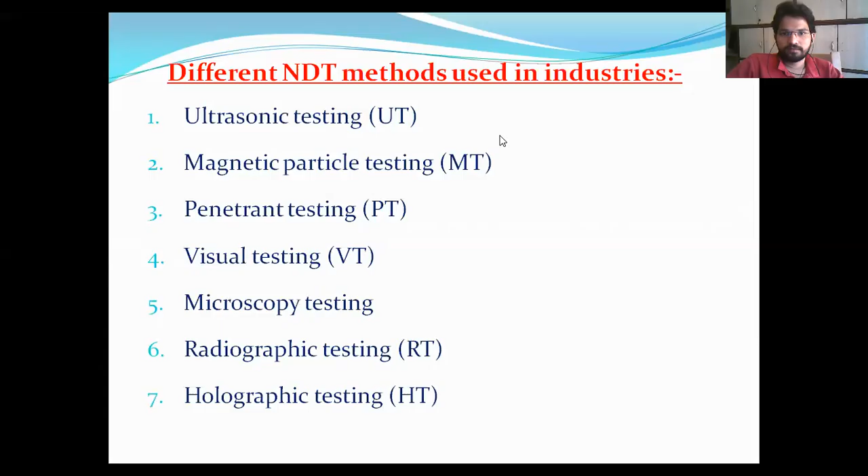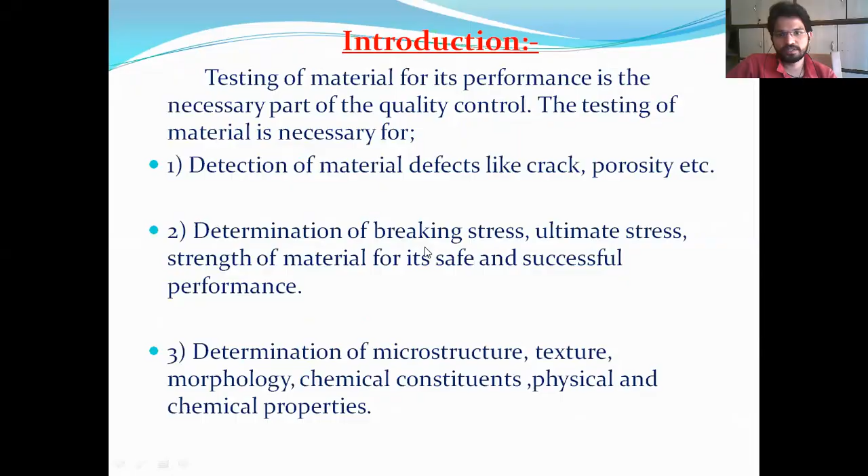Just consider repetition केलं तर again बघा, you consider again your chapter content, your introduction, what are the testing material, why the testing of material is necessary, then its defects, breaking stress किती आहे, microstructure किती आहे, testing च्या दोन मेथड, destructive testing, non destructive testing.

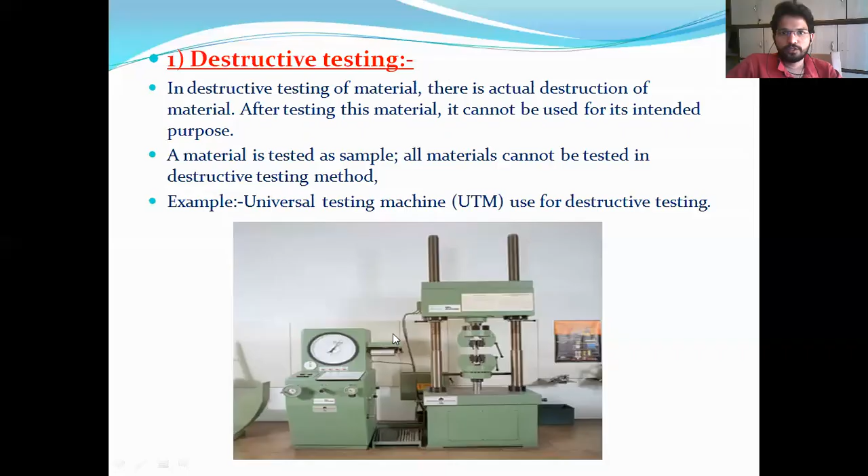Destructive testing means testing with actual breaking of the material. This material can be tested, example दिले UTM machine. Non destructive testing means without destruction of material can be tested.

Its advantages for the NDT methods, limitations of NDT methods, त्याचे disadvantages काय किंवा demerits. Criteria for selection of the NDT methods.

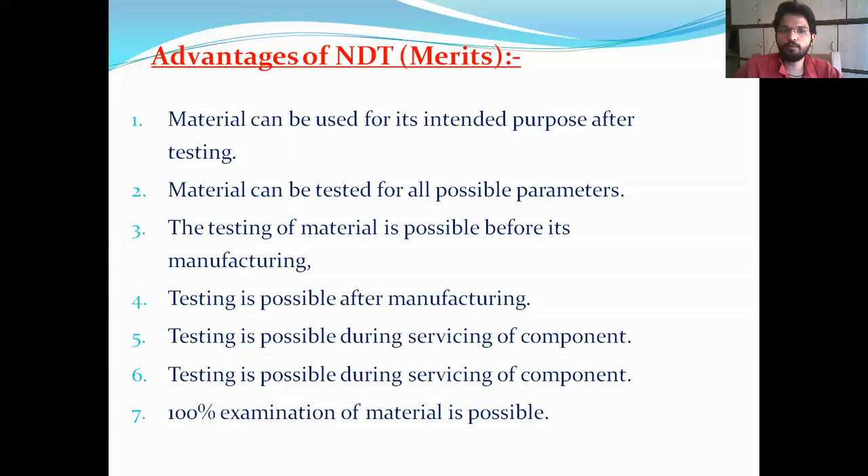Criteria means याच्यावरती MCQs काय विचारतात, MCQ mainly different, which are the following is advantages of NDT methods. Means तीन दिलेले असतात, फोर्थ ऑप्शन असतो ऑल ऑफ दी अबोव, और हे मिक्सअप करतात लिमिटेशन ऑफ एनडीटी मेथड्स किंवा डिसएडव्हांटेजेस आणि ऍडव्हांटेजेस. विच ऑफ द फॉलोइंग इज ऍडव्हांटेजेस और डिसएडव्हांटेजेस, त्यावरती तुम्हाला करेक्ट ऑप्शन चूज करायला लागतं.

And then one more is a different criteria for selection of NDT methods. हे पण MCQ मध्ये विचारतात. Different NDT methods used in industries.

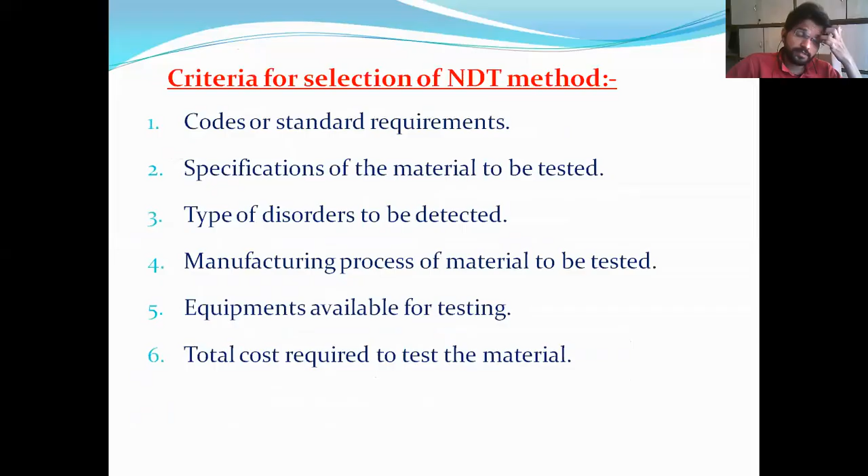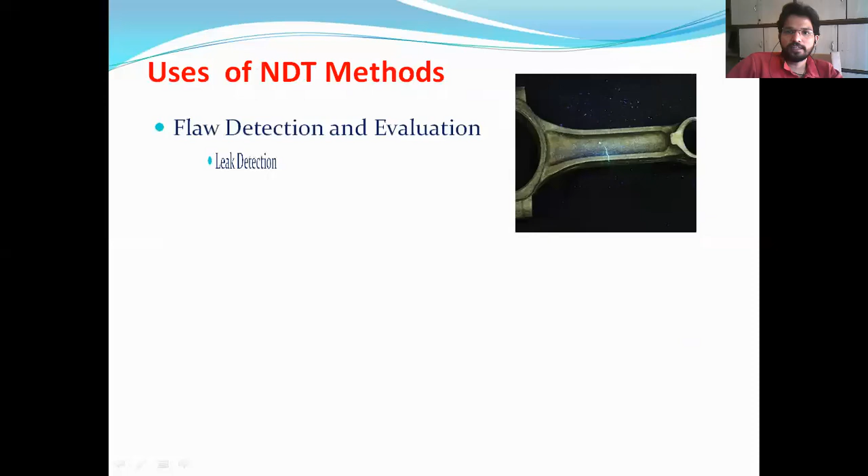Now we are going to, again, the introduction of the non-destructive testing. Some people are for the testing of the material as NDT methods. The uses, the NDT methods uses कोणकोणते?

Flaw detection and evaluation, leak detection, location determination, dimensional measurement, structure and microstructure characterization, estimation of mechanical and physical properties, stress, dynamic response measurement, material sorting, and the chemical composition determination.

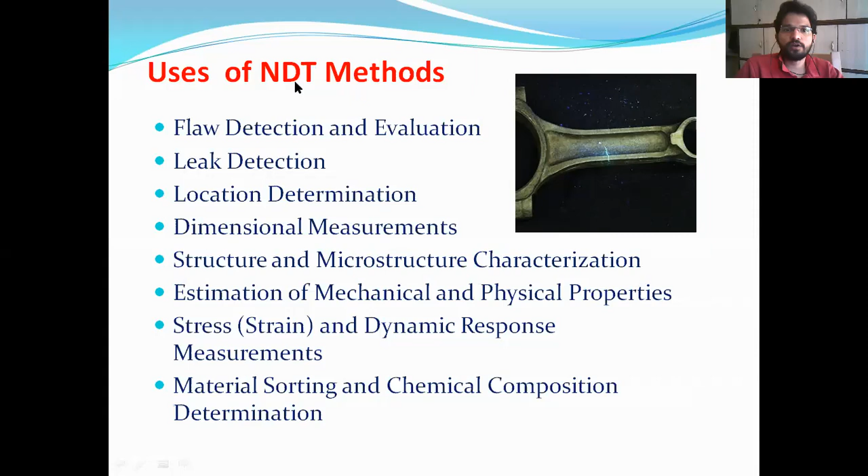These are the use of the NDT methods, or upon using NDT methods कोणकोणते specification किंवा which testing we have to done. Hence uses of NDT methods are when the NDT methods is used.

Remember, there are NDT application at almost any stage in production and life cycle of component. When we use to assist product development, to screen and sort incoming materials, to monitor, improve or control manufacturing process, to verify proper processing such as heat treating, to verify proper assembly, to inspect for in-service damage.

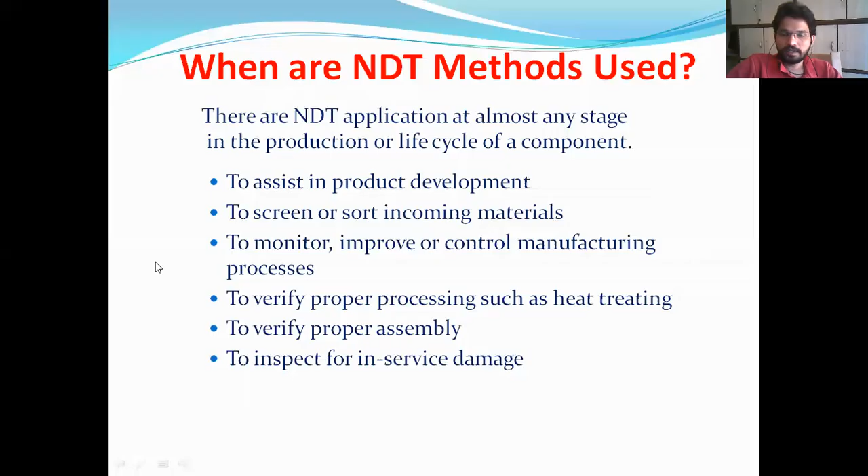That means we have to use NDT methods when these are the content. Next, 6 common NDT methods are usually used: visual testing, liquid penetrant testing, magnetic, ultrasonic, eddy current, and X-rays. See one by one.

Visual inspection. Now, most basic and common inspection method tools include the fiberscopes, borescope, magnifying glasses, and mirrors. This is the visual inspections. See the diagram where तुम्हाला दिसेल.

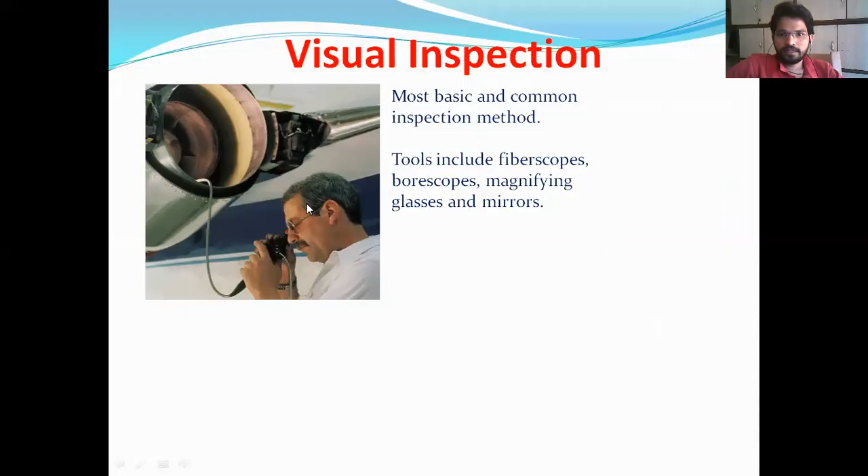Next is the portable video inspection unit with zoom allowed inspection of large tanks and vessels, railroad tank cars, and sewer lines. Using this technique, video inspection, we can do the visual inspection.

Again, robotic crawlers permit observation in hazardous or tight areas such as air duct, reactor, and pipeline. Visual inspection मध्ये रोबोटिकचा यूज होतो बिकॉज काही पाइप्स असतील किंवा एअर डक्ट असतील. In that we can't go directly.

Using the robotic, we can determine, as right from the pipeline, big pipeline say, we have to estimate the defects किंवा cracks किंवा काही कचरा अडकला असेल, आपण या रोबोटिकच्या याने डिटेक्ट करू. That's a visual inspection.

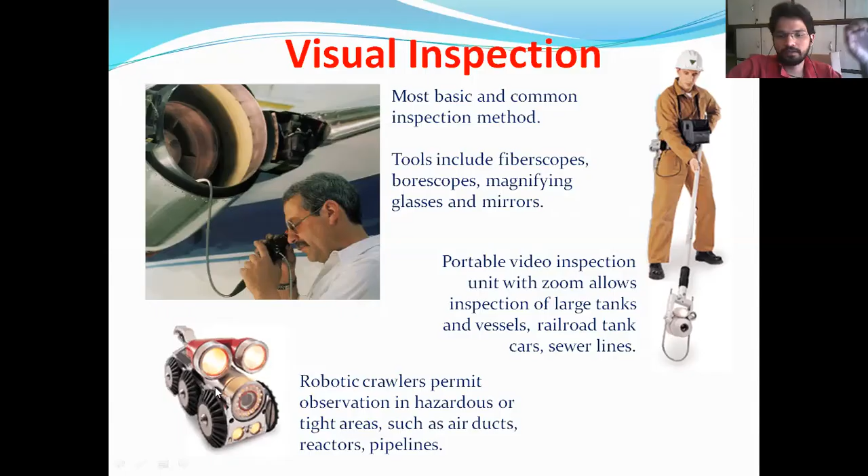मगाशी सांगितल्याप्रमाणे लिक्विड पेनिट्रंट टेस्टिंग मध्ये, सी एक ऑब्जेक्ट आहे, त्या ऑब्जेक्ट वरती is wetted by the liquid of high surface wetting characteristics applied to the surface part and allow time to seep into the surface breaking defect. या ज्या गोल्ड डिस्क आहे त्या गोल्ड डिस्क वरती मटेरियल लिक्विड पावर केलेलं आहे. That's a high surface wetting characteristics.

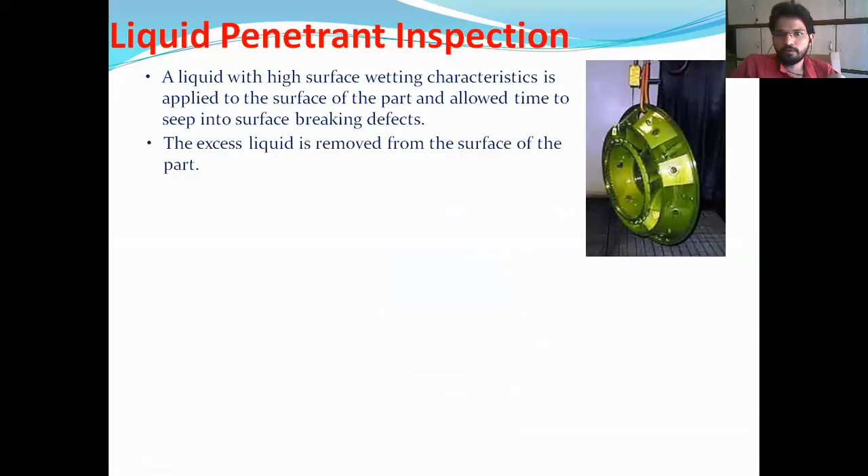After that, see, excess liquid removed from the surface of the part by using this technique. Excess liquid is removed, and the developer is applied to pull trap penetrant out of defect and spread it on the surface where it can be seen.

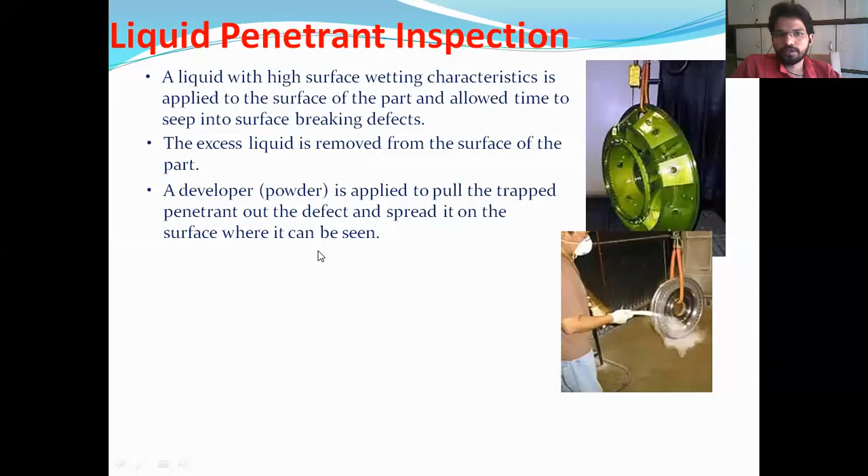After that, using the visual inspection is the final step in the process. The penetrant used is often loaded with fluorescent dye and inspection is done under UV light to increase the test sensitivity. आता या डिस्क वरती after the washing एक penetrant will be applied developer आणि that developer material असं असतं की त्यावरती लाईट पडली की ग्लो होतं.

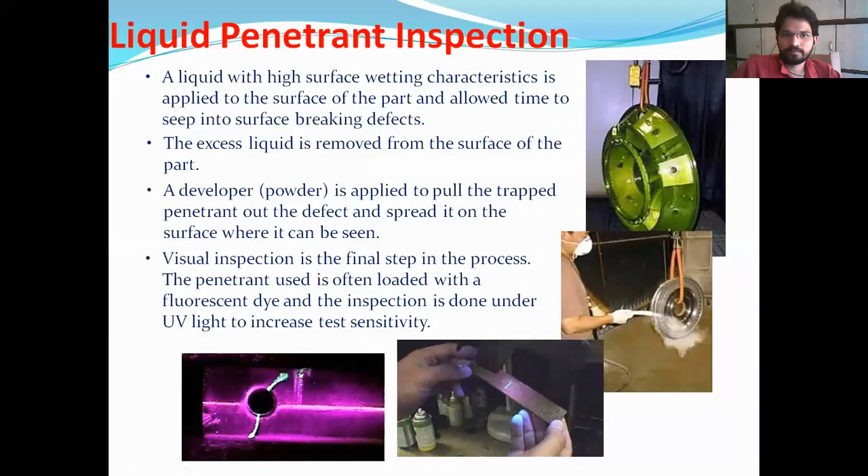In the diagram you can see this is a crack, and this is the object given. See, the part is magnetized.

Finally, milled iron particles coated with dye pigment are applied to the specimen. These particles are attracted to the magnetic flux leakage field and cluster to form an indication directly over the discontinuity. This indication can be visually detected under proper lighting conditions.

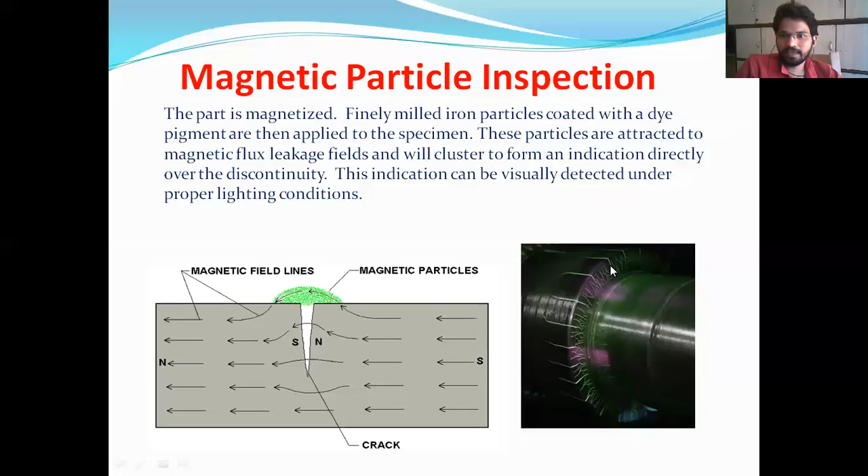This means magnetic material, with magnetic field lines applied to this material, and this is a crack, and these are the magnetic particles. The south to north flow shows the indication, and the magnetic particles will be seen; the crack will be seen by magnetic testing.

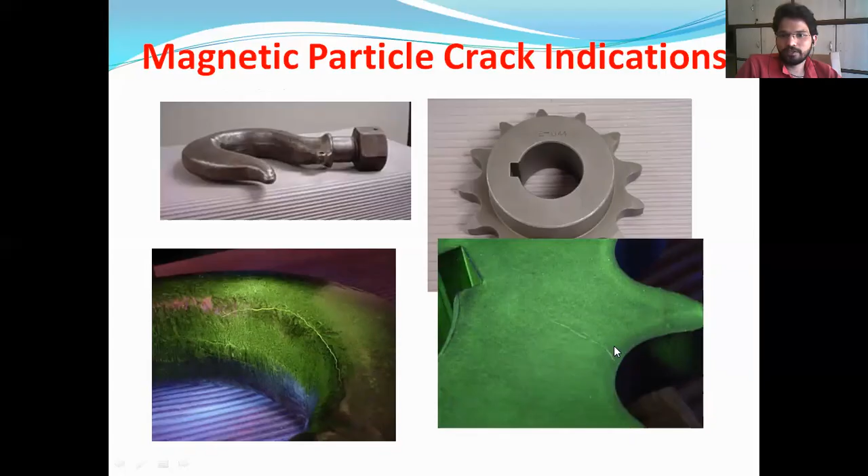See, this crack is identified by magnetic testing. Now on this object you can see this is one crack, identified using the magnetic particle crack indication method.

Next we call it radiography, or we have to use X-ray. Radiation used in radiography testing is a higher energy, shorter wavelength version of electromagnetic waves compared to visible light. Radiation can come from an X-ray generator or radioactive sources.

So this is one source, and from here electrons are emitted or incident on the object. You can see on the left the electromagnetic spectrum like visible, ultraviolet, X-ray, gamma. That's nothing but radiography.

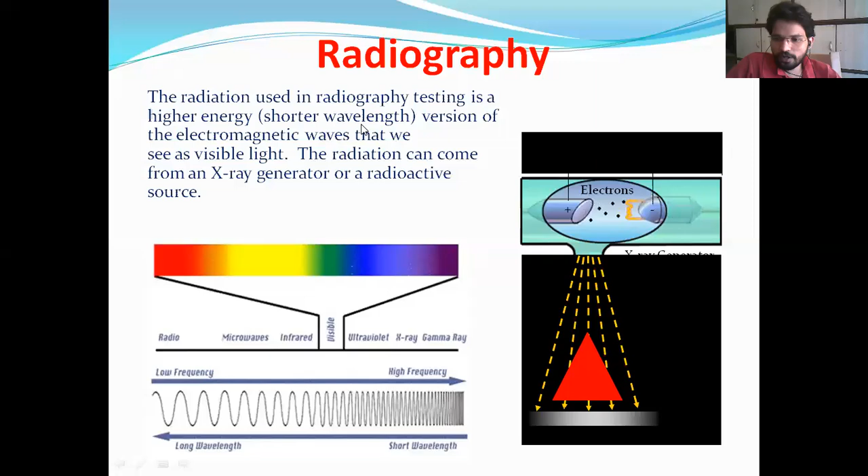And how are radiographic images given? See, in film radiography the part is placed between the radiation source and a piece of film. The part stops some radiation; thicker and more dense areas will stop more of the radiation.

This is the radiation to this block. In that blockage there is one crack. In a metal sheet or inside the object there is a crack, and that crack we identify by the X-ray film.

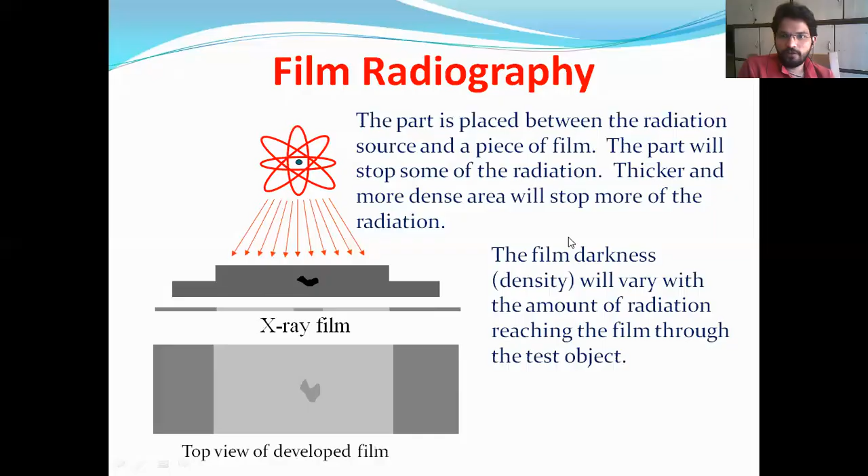The film darkness will vary with the amount of radiation reaching the film through the test object. Now you have this object, and the X-ray film will look like this. Without this crack, totally it's less exposure.

This crack will be identified by the film radiograph. This is one technique of NDT.

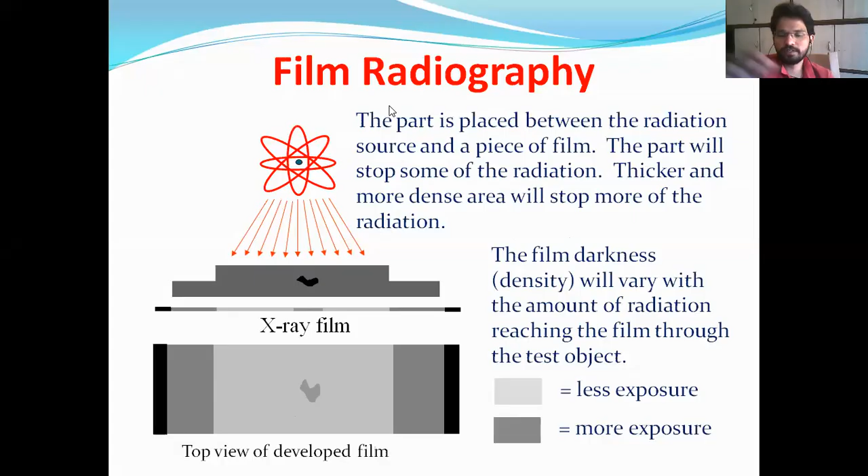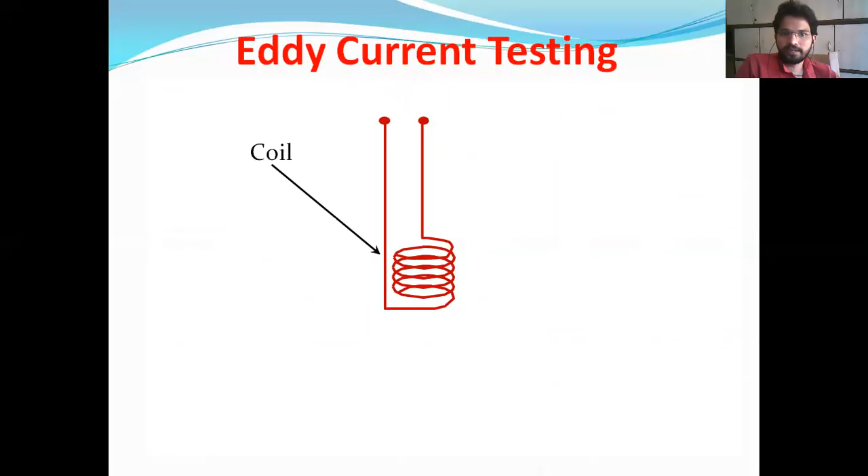Next is eddy current. Eddy current means the current which opposes the flow of electric current. This is a magnetic current, we can say.

Coil magnetic field alternating current is used, and using this, a high coil magnetic field is generated, and this is used to detect the conducting material. We can call this eddy current.

Using eddy current we can find cracks or testing of material will be done. Eddy current testing is particularly well suited for detecting surface cracks, but is also used to measure electrical conductivity and coating thickness. Small surface probes scan over the part surface in an attempt to detect the crack.

See, for an object, the crack in that object we can identify by the screen. On this CRT you will see a crack, a graphical image appears. This is nothing but eddy current testing.

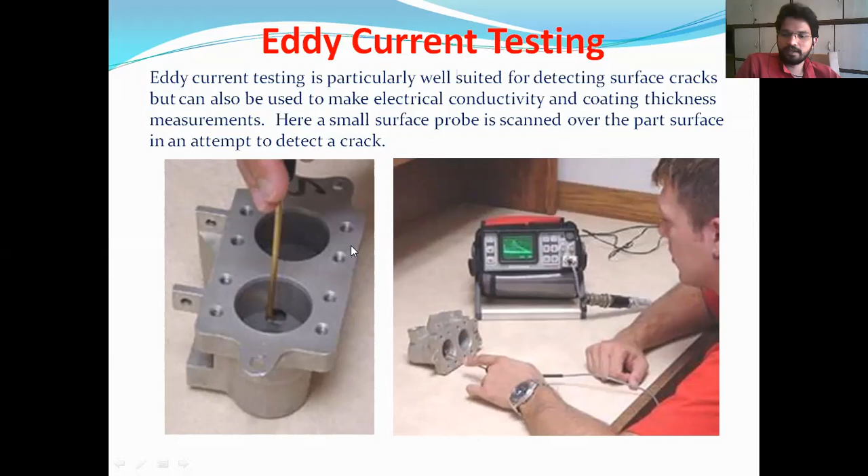Ultrasonic inspection, or the pulse echo method, you can see one object here. On the object there is a transducer, and the transducer is attached to a monitor or CRT. In this object there is one crack, and that crack is detected using the pulse echo method.

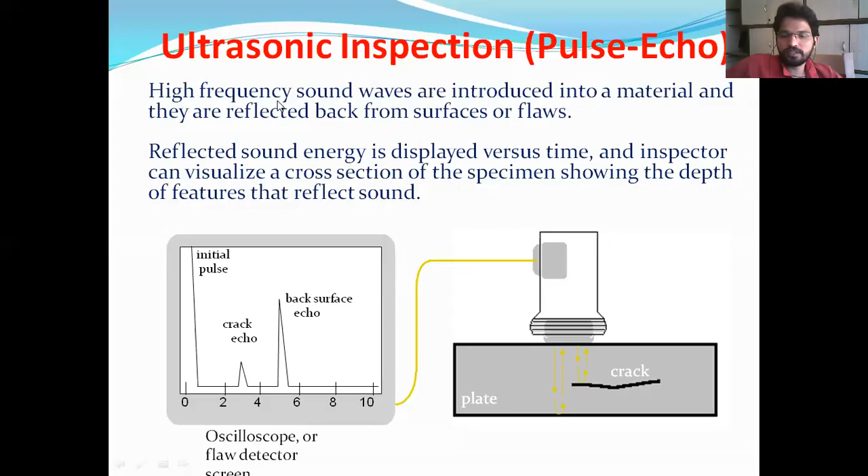The reflected sound energy is displayed versus time, and inspectors can visualize the cross section of a specimen showing the depth of a feature that reflects sound. This is ultrasonic testing. High resolution ultrasonic images are produced by plotting the signal strength or time of flight using computer controlled scanning systems.

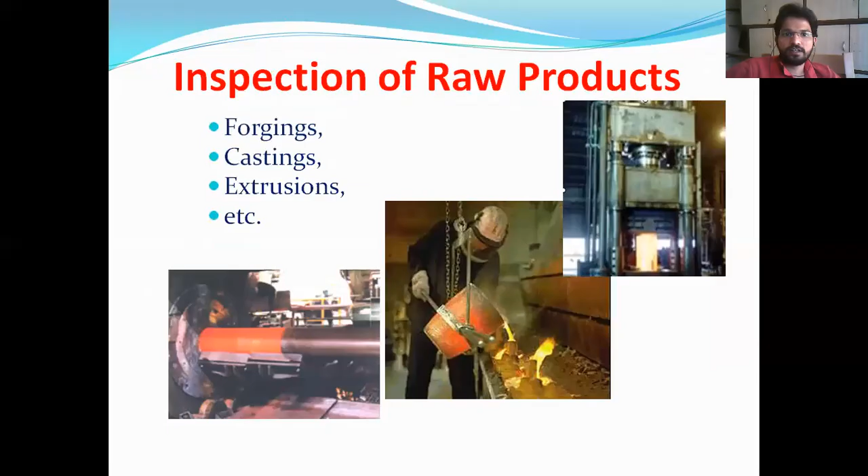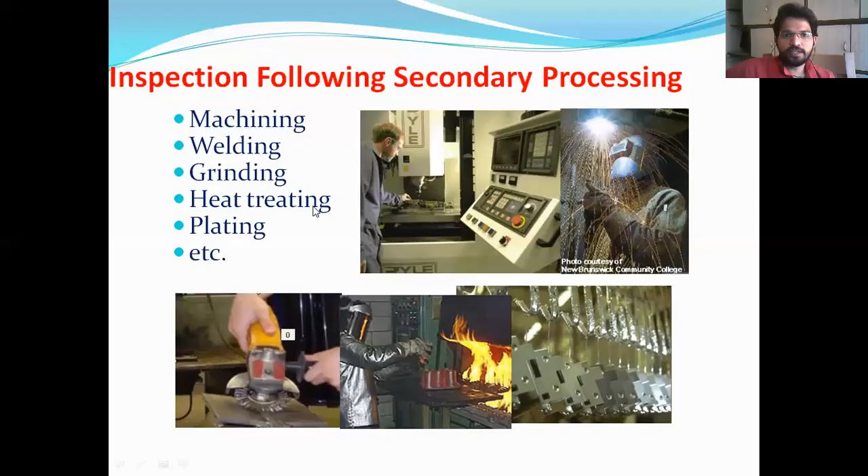Common applications of NDT methods include inspection of raw products and inspection following secondary processing. In surface damage inspection, raw products from forging, casting, extrusions, etc. are inspected. Next is inspection following secondary processing such as machining, welding, grinding, heat treating, and plating. These are applications of NDT.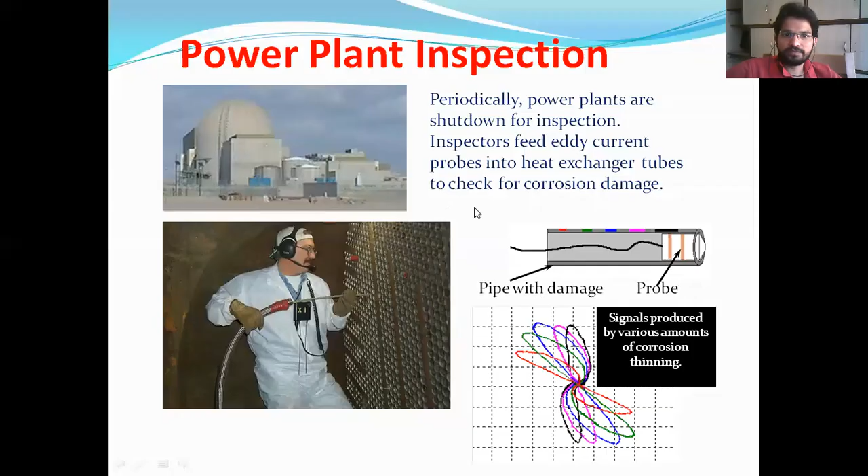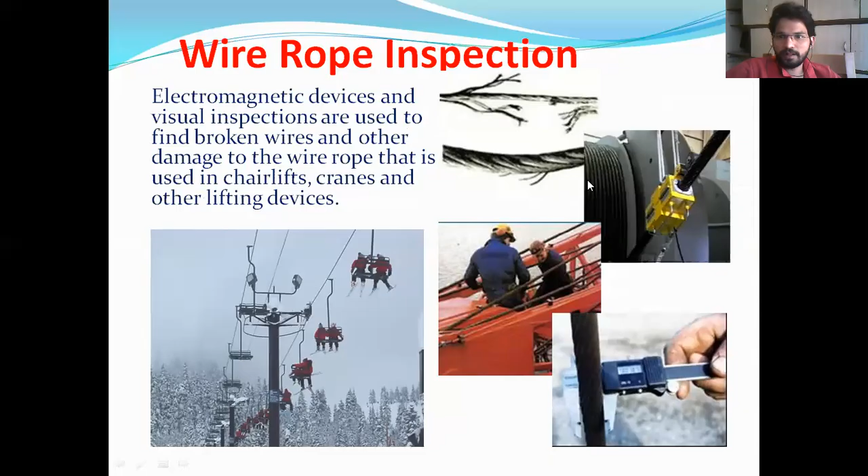Storage tank inspection - for water tanks, robotic crawlers using ultrasound inspect the walls of large above-ground tanks for signs of thinning due to corrosion, using internal crack detection for storage tank inspection. Cameras on long articulating arms are used to inspect underground storage tanks for damage.

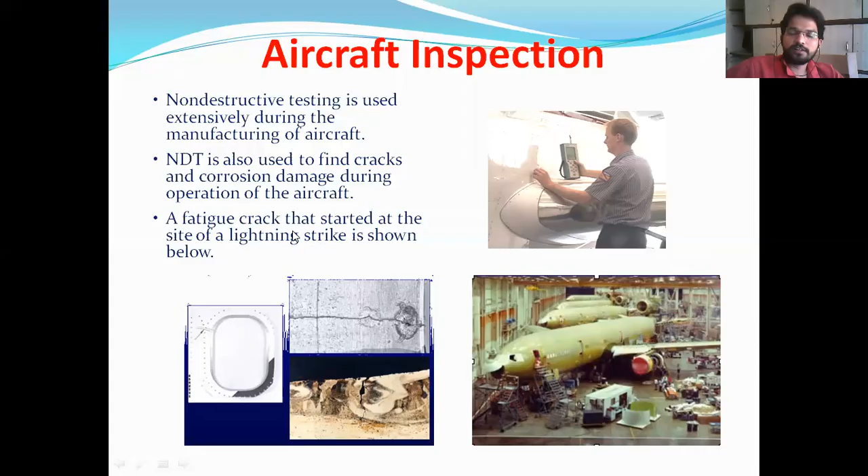For aircraft inspections, if there are internal cracks in the aircraft body, you can identify them using NDT methods. NDT is used to find cracks and corrosion damage during aircraft operation. A fatigue crack that started at the site of a lightning strike is shown below - cracks on the aircraft can be detected by ultrasonic testing. Next, jet engine inspections.

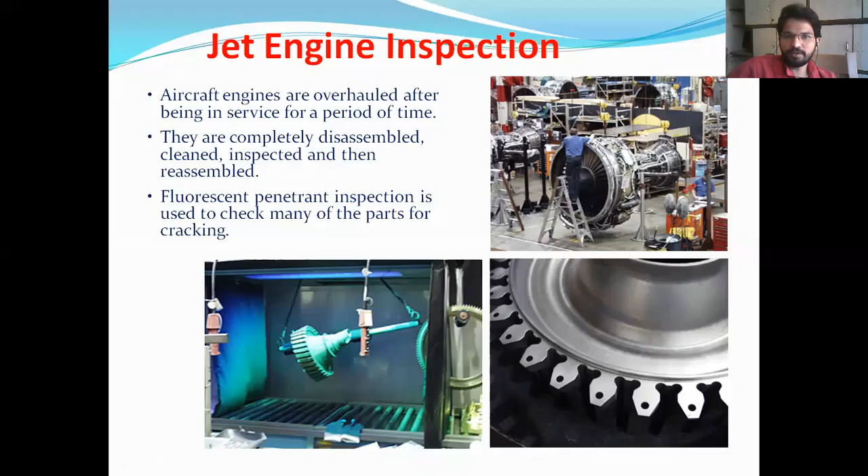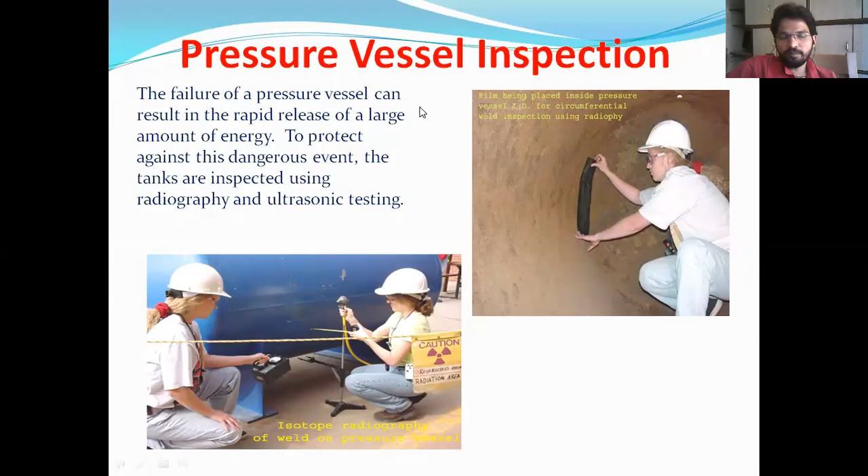Next is pressure vessel inspection. Failure of a pressure vessel can result in rapid release of large amounts of energy, and to protect against this danger, tanks are inspected using radiography and ultrasonic testing. Suppose it's a pressure vessel and there is internal damage assumed - it can be identified by radiography or ultrasonic testing. So that's one method of pressure vessel inspection.

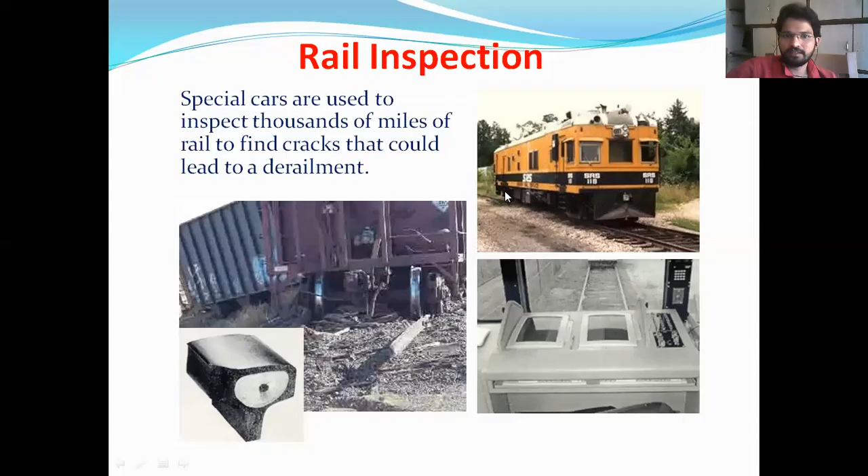Rail inspections are also done. Special cars are used to inspect thousands of miles of rail to find cracks that could lead to derailment. Now there are small rail inspection devices used for damage in a rail, or if there are some cracks, using rail inspection.

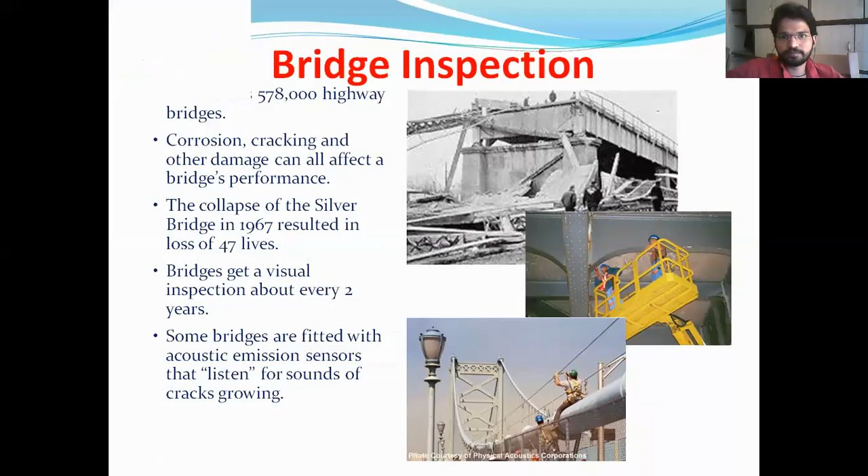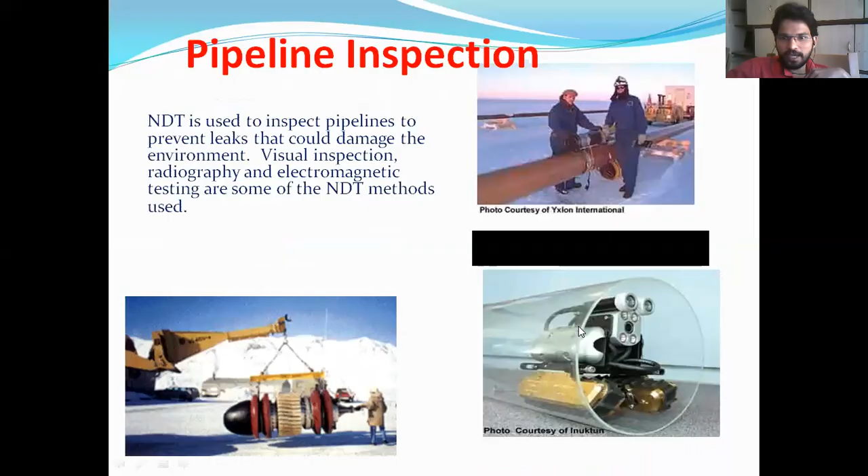Pipeline inspections - NDT is used for inspection to prevent leaks that could damage the environment. Visual inspection, radiography, and electromagnetic testing are some of the NDT methods used. You can see the photographs - pipelines can be identified or inspected by NDT methods.